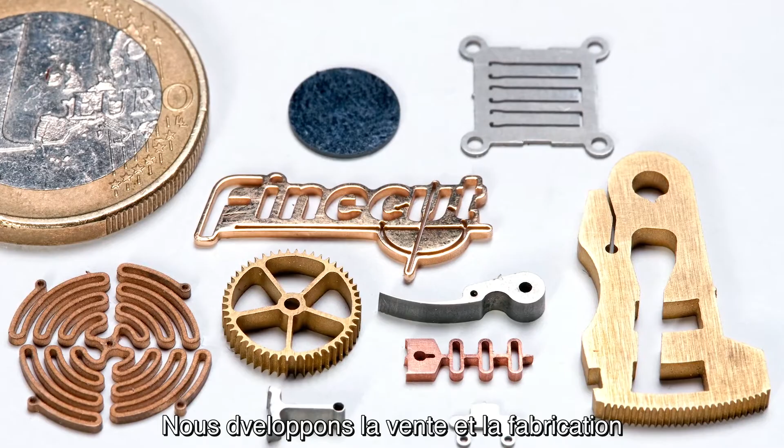Finepart Sweden was established in 2012. Our founders have more than 30 years experience in developing water jet technology, and we are pioneers in the microabrasive water jet field. We are developing, marketing, selling and manufacturing highly accurate water jet machines for fine mechanics.

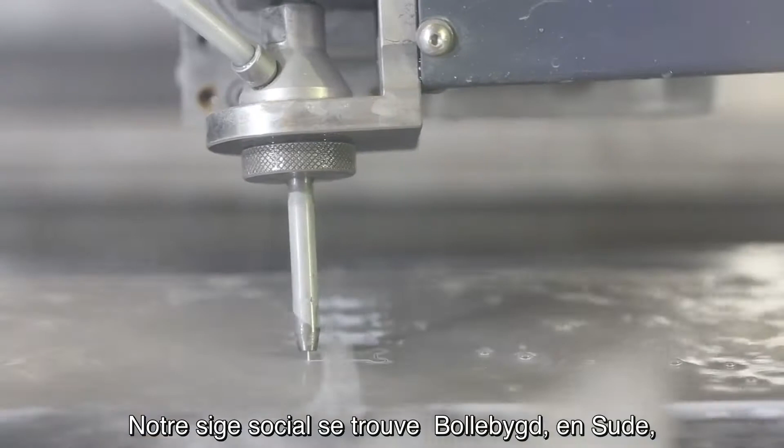Our headquarters is in Bollebygd, Sweden, where we also have a cutting and demo center for making test cuts and demonstrating our capability. Our main markets are the Nordic region, US, Switzerland and Germany. We are selling through distributors and agents worldwide, and the Nordic region is covered in-house.

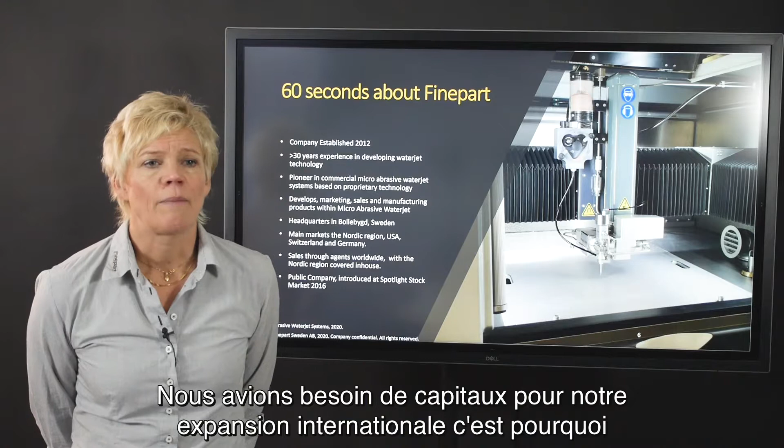We needed capital for our international expansion, and Finepart was listed on Spotlight Stock Market in 2016, and we have been a public company since then. The movie shows cutting with a 5-axis Finecut machine.

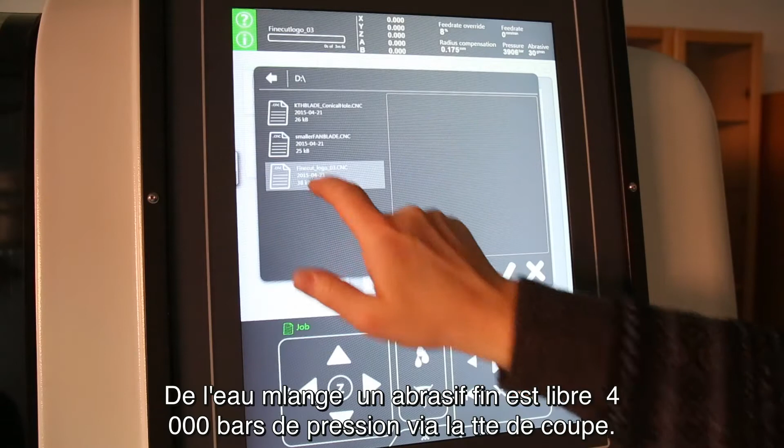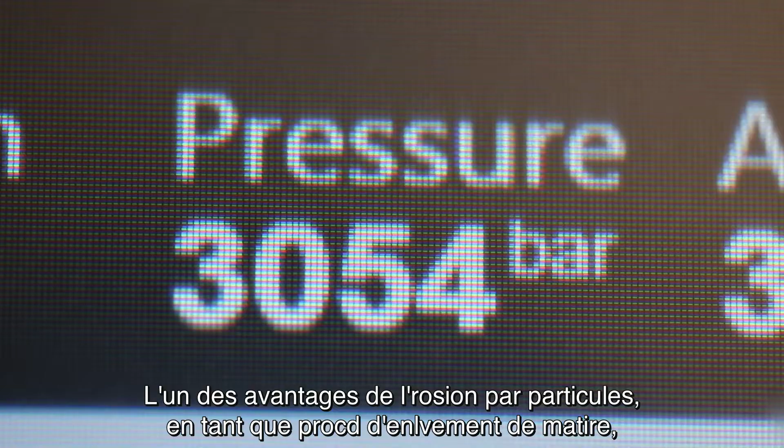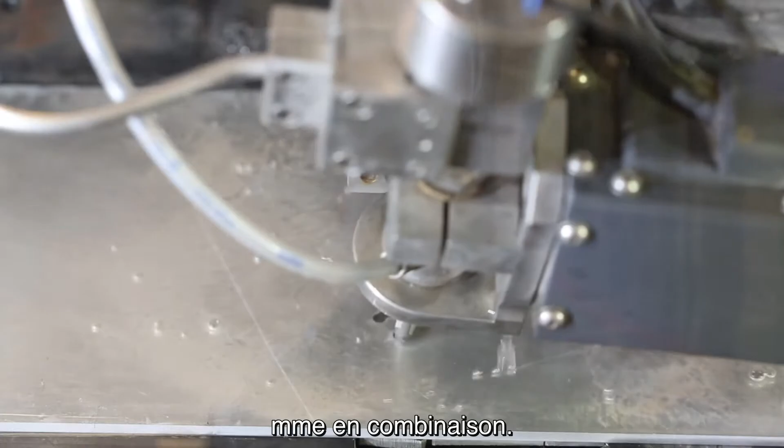Water with 4000 bar pressure is released through the cutting head and mixed with a fine abrasive. The particle erosion mechanism in the jet removes material without generating any heat. A benefit of particle erosion as a material removal process is that it adapts to the material, making it capable of cutting virtually all materials, even in combination. We have developed our own human-machine interface, which makes the machine easy to operate.

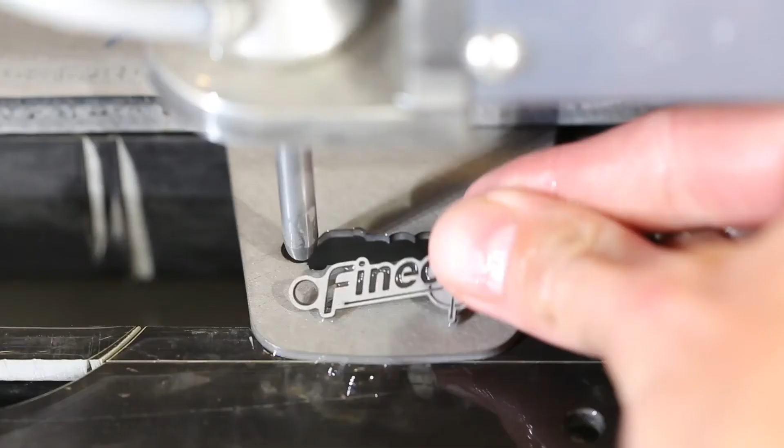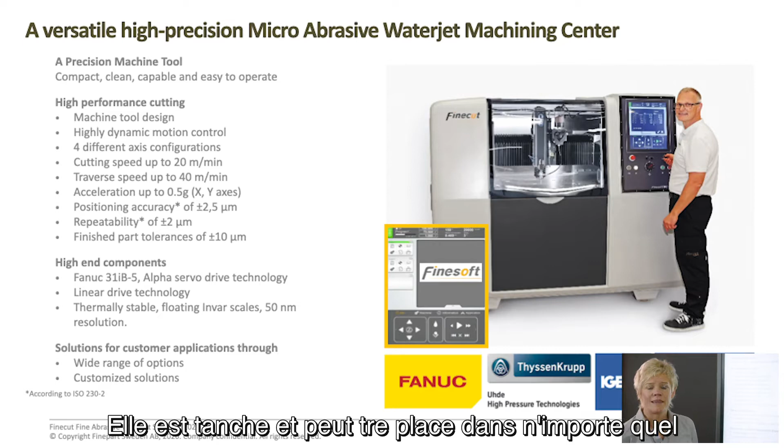Our main product is the Finecut machine, a versatile high-precision machining center with microabrasive water jet technology. It's a precision machine tool which is easy to operate. The Finecut machine is compact and has a small footprint. It's encapsulated and can be placed in any workshop environment close to other sensitive CNC equipment.

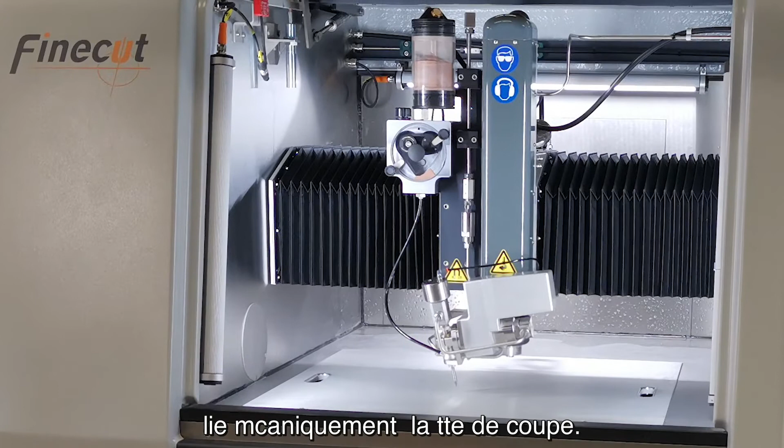The machine is designed and built for precision and has high performance. It has a machine tool design, and the worktable is mechanically linked to the cutting head. It has highly dynamic motion control and is available with 4 different axes configurations: 3 axes, 4 axes, and 2 different types of 5 axes.

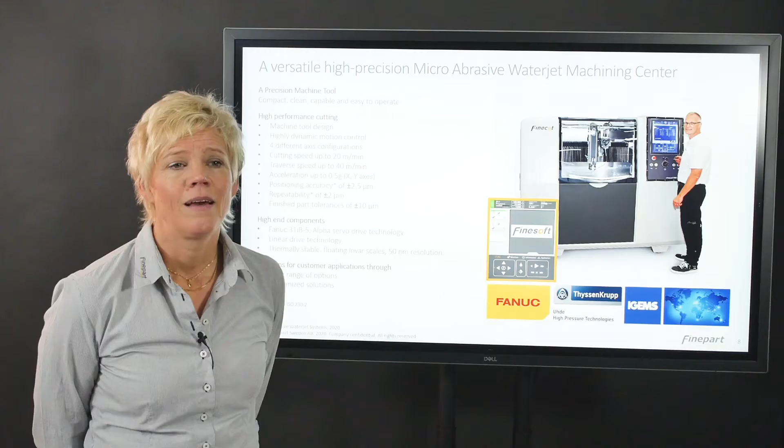The cutting speed can be up to 20 meters per minute, and the traverse speed is up to 40 meters per minute, which gives quick relocation between cutting paths. Positioning accuracy is plus or minus 2.5 microns, repeatability is plus or minus 2 microns, and finished part tolerance is down to plus or minus 10 microns.

To enable high accuracy, we have built the Finecut from state-of-the-art components. It has a Fanuc 31i-B5 controller with Alpha Servo drive technology. All our machines come with this 5-axis controller, even the 3-axis version, which means they can easily be upgraded with additional axes later on. It has strong linear drive on the X and Y axis and thermally stable floating linear scale.

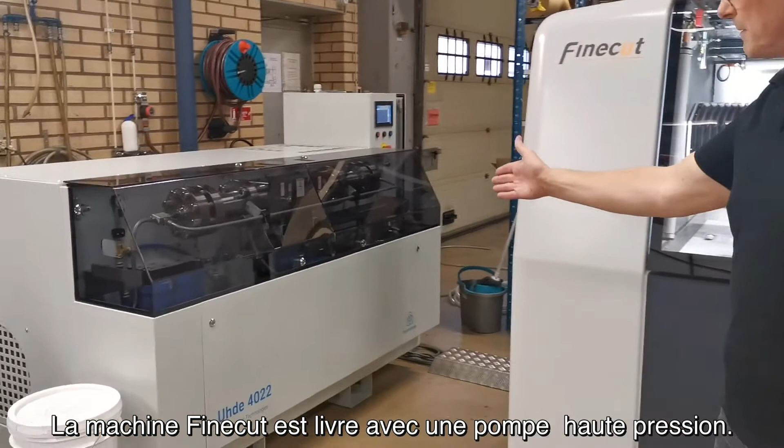With 50 nanometer resolution, we are good at providing solutions for customer applications and have a wide range of options which can all be retrofitted. The Finecut machine comes together with a high pressure pump. We are using pumps from Uhde, which is part of ThyssenKrupp.

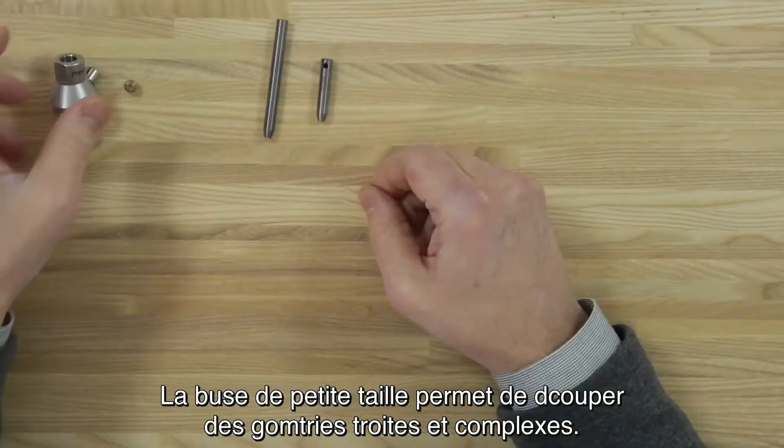Many people know about traditional water jet, but what is microabrasive water jet machining? We have developed our own cutting system and can go down to 0.2 millimeter diameter in jet size. The small nozzle allows cutting of narrow, complex geometries. Nevertheless, we can fit larger nozzles in the system as well, if cutting power is of greater importance.

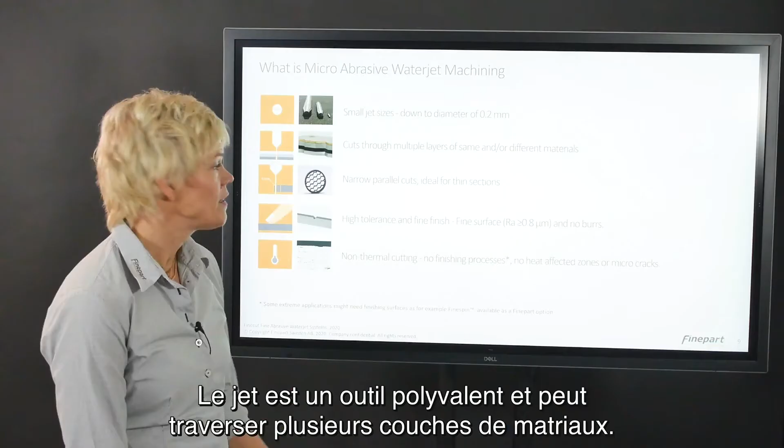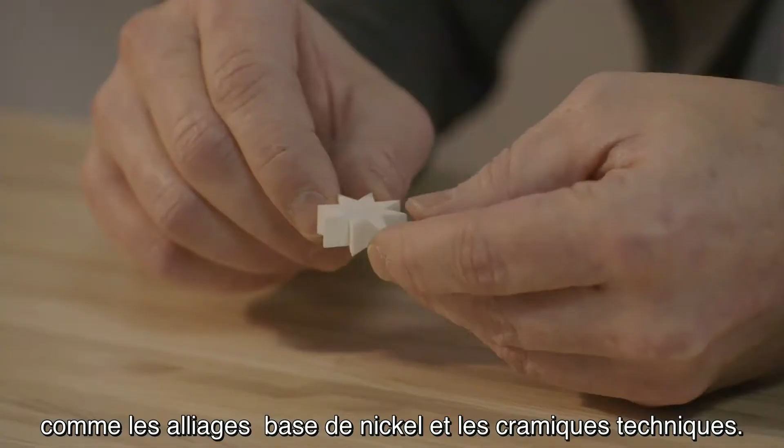The jet is a versatile tool and can get through multiple layers of materials, no matter if it's the same material or materials with different hardness and properties. Our process is capable of cutting all materials, even hard-to-machine materials like nickel-based alloys and engineered ceramics.

The cutting forces are low and give no distortion of the surface, which allows cutting of narrow parallel cuts. It's ideal for thin sections and can cut part segments down to 0.1 millimeter width. Cutting can be made with high accuracy, leaving a fine surface finish. In hard materials, the RA value can be as good as 0.8 microns.

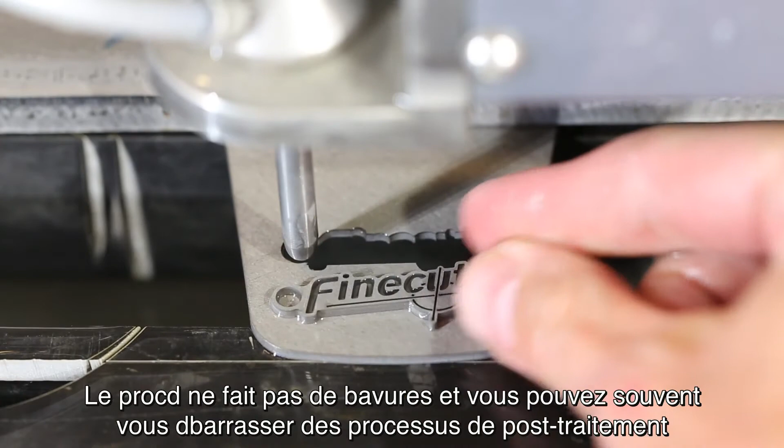The process gives no burrs, and often you can get rid of subsequent processes as the surface is fine and smooth after cutting. One of the advantages of water jet technology is the non-thermal cut. It gives no heat-affected zones, no recast layers and no micro cracks. There is no material distortion and the material properties are maintained.

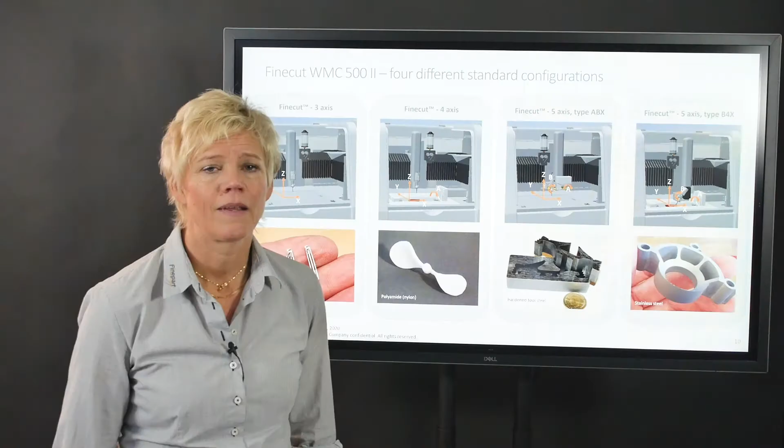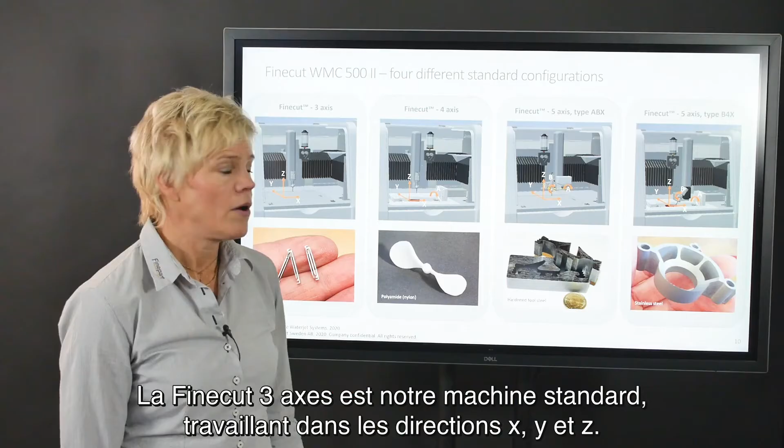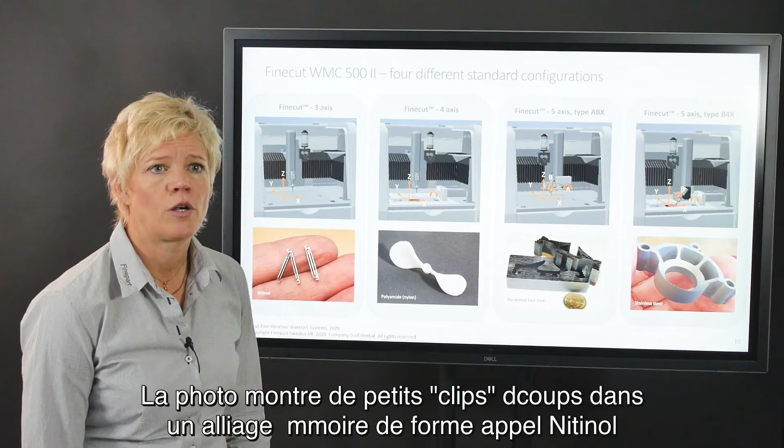As mentioned before, we have 4 different standard configurations of the Finecut machine. Finecut 3-axis is our standard machine, working in X, Y and Z direction. It is mainly used for cutting two-dimensional parts from a plate, even though the Z-axis can also follow contours vertically if needed. The picture shows small clips cut in shape memory alloy called Nitinol with 10 micron tolerance.

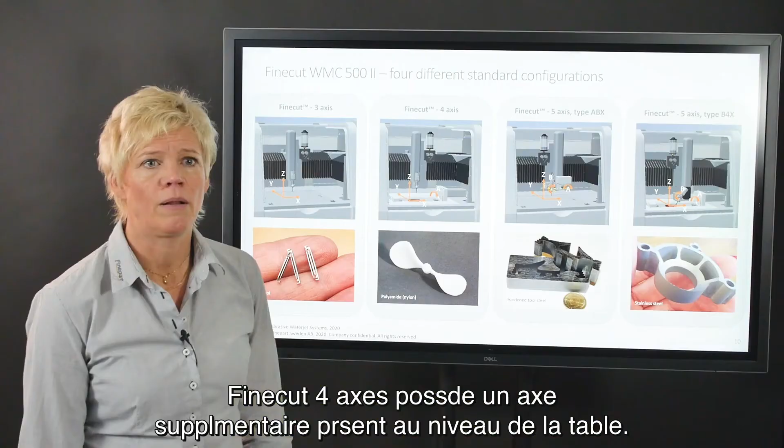It's used for surgery. Finecut 4-axis has one additional axis mounted in the table. The additional A-axis can rotate the workpiece synchronously with the cutting and is capable of cutting more complicated parts like the propeller shown on the slide.

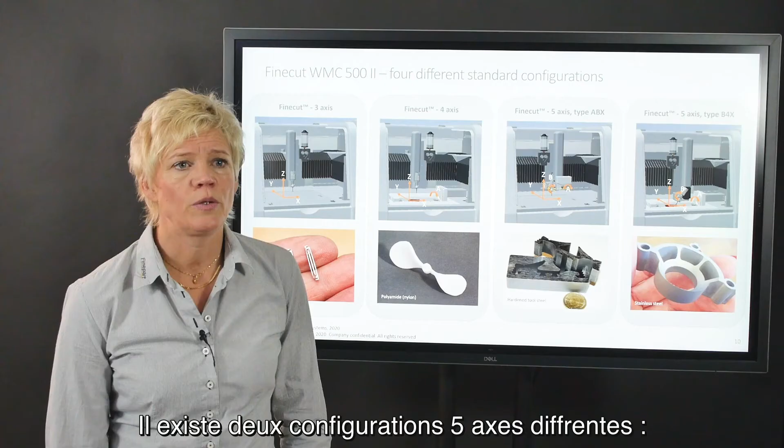We have two different types of 5-axis configuration. The first one is called ABX and has the A and B axis mounted on the Z-axis. This means the cutting head can move plus or minus 15 degrees in all directions. It's mainly used for taper angle control and allows much higher cutting speed, still providing a straight cut. The picture shows a part in hardened tool steel cut with a release angle.

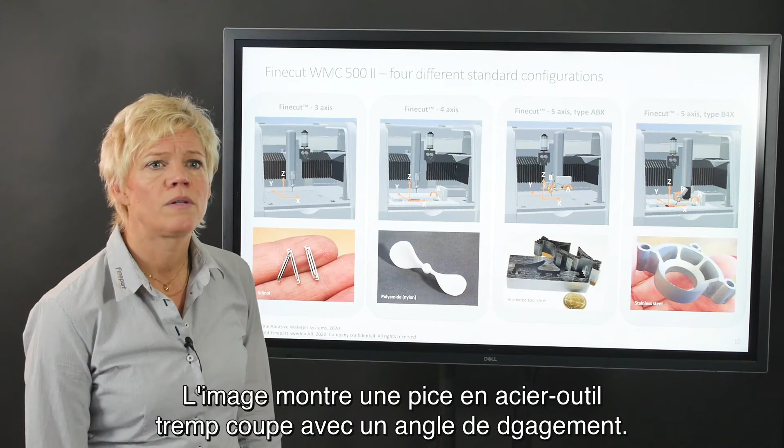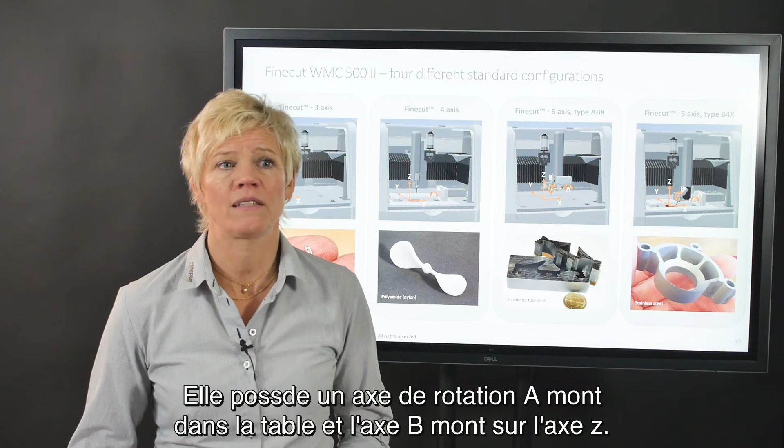The second type of 5-axis configuration is called BAX. It has a rotating A-axis mounted in the table and the B-axis mounted on the Z-axis. This means the workpiece can rotate 360 degrees and the cutting head can tilt 45 degrees in one direction. This allows cutting of complex 3D parts with high angles.

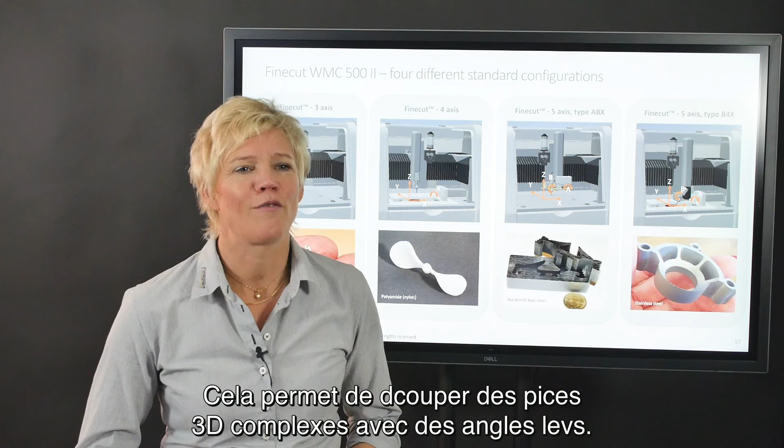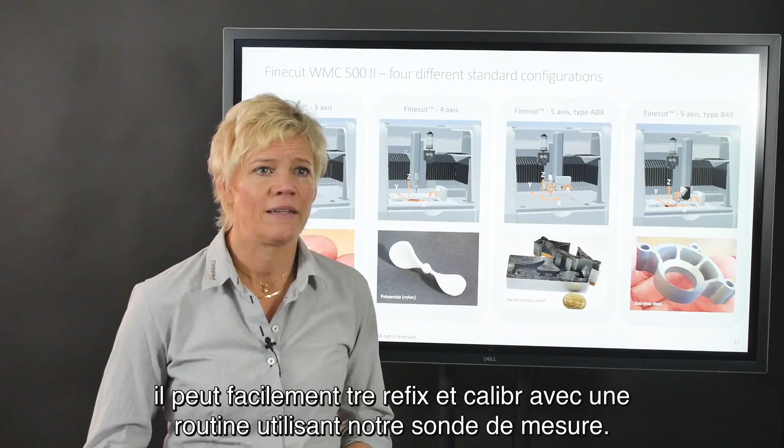All machines can be operated in 3-axis mode, and their rotating axis can be detached to utilize the full work envelope. Whenever the additional axis is going to be used again, it can easily be reattached and calibrated with a routine using our measuring probe.